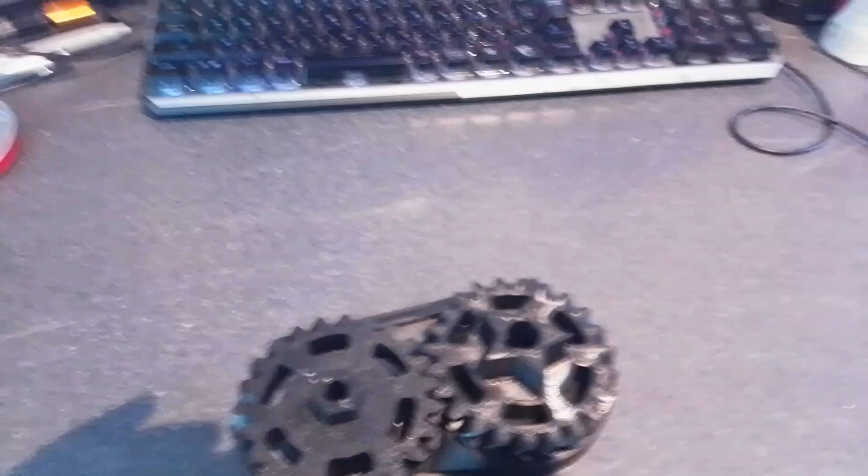Okay, I quite like doing the little video diary thing where I just patch together a few short videos. So I think I'll do it for this day. Today, I'm printing parts for the knee drive. That's a test piece, so let's just disable all this junk.

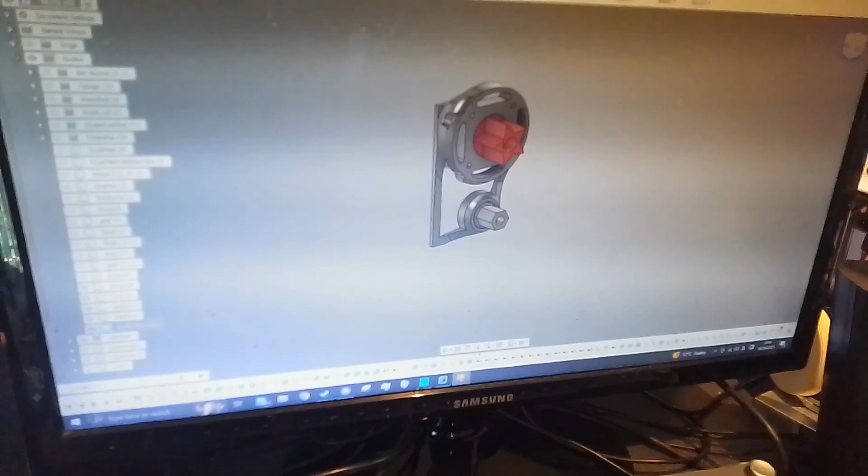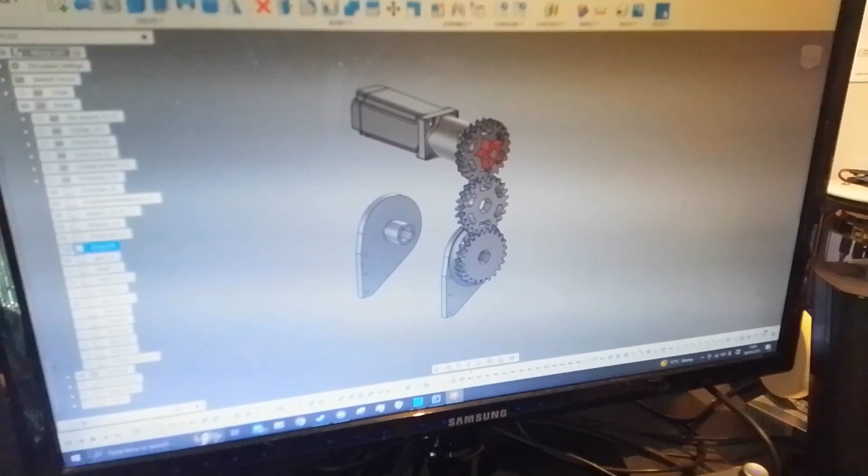We need the gears, the knee plates. Cool. That's the interface. The motor, which will sit right there. Shaft lock for the interface for the first gear. That's an empty body, I think. No, that's doing something. We'll leave that for now. We've got the shafts to keep the gears aligned.

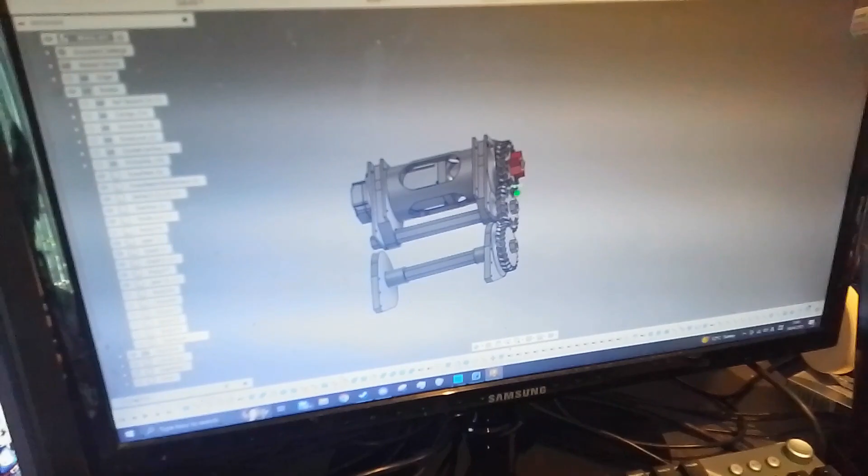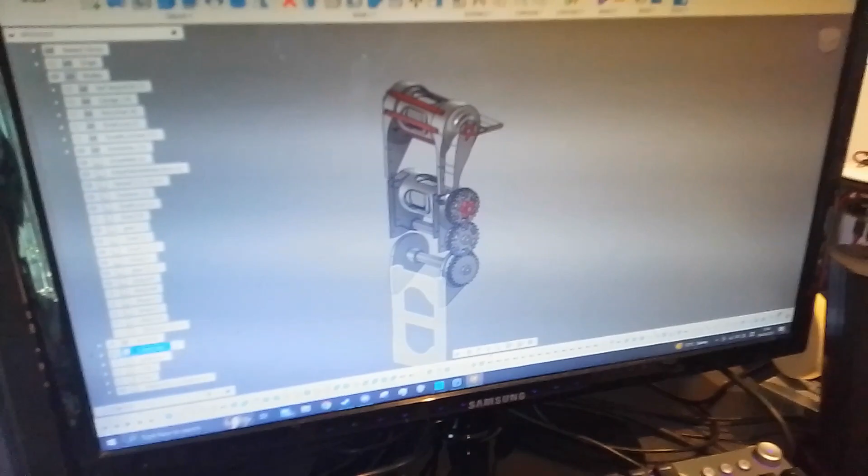We've got the motor casing, which is mahoosive as well. It needs to be printer friendly. I'm not happy with it, but one day this will be made out of something that's not PLA. And then a little interface for the shaft to rotate nicely, and then the rest of that's just test pieces. So let's turn on the hip, which will sit right there, and let's turn on the leg plates so we can see it in its glory.

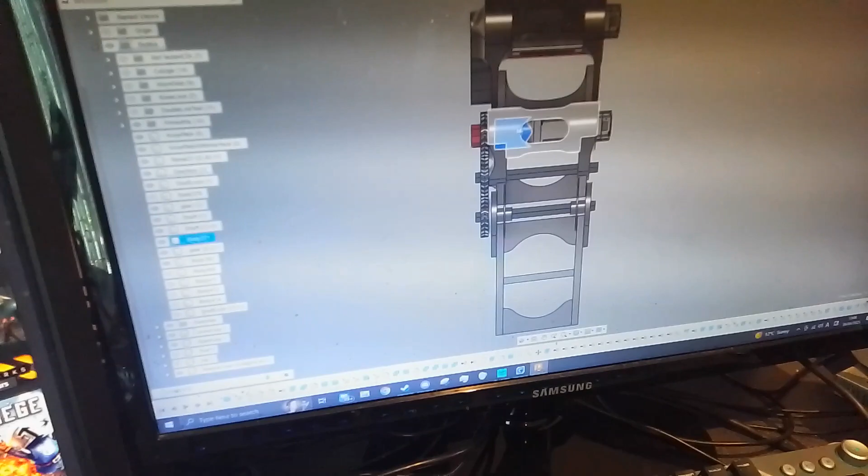As we can see, it's going to be quite large. It's still really wide, and that's just because of the pure size of the gearbox here. It's so long. So when we get a custom gearbox made, all of this, like transmission here, can be pushed inside of the leg. But for now, this is fine. And I mean, the profile, it's really not that bad. I thought I was going to have to use a lot more gears to achieve this. These are herringbone gears, so it should be pretty good for lack of backlash.

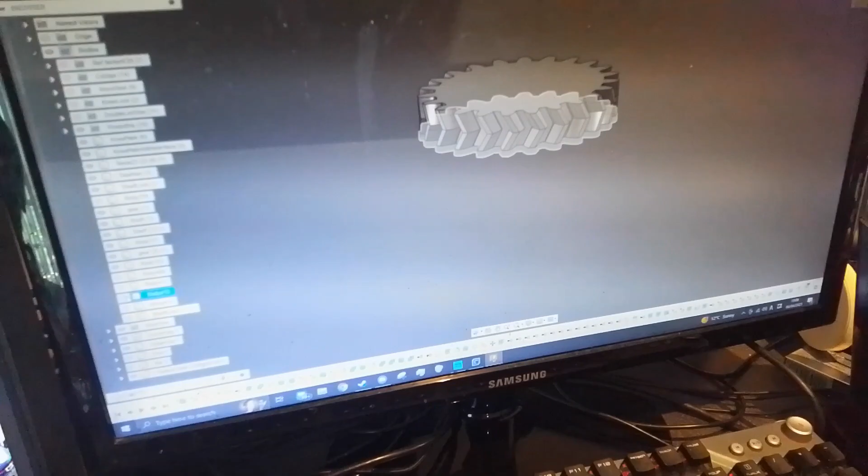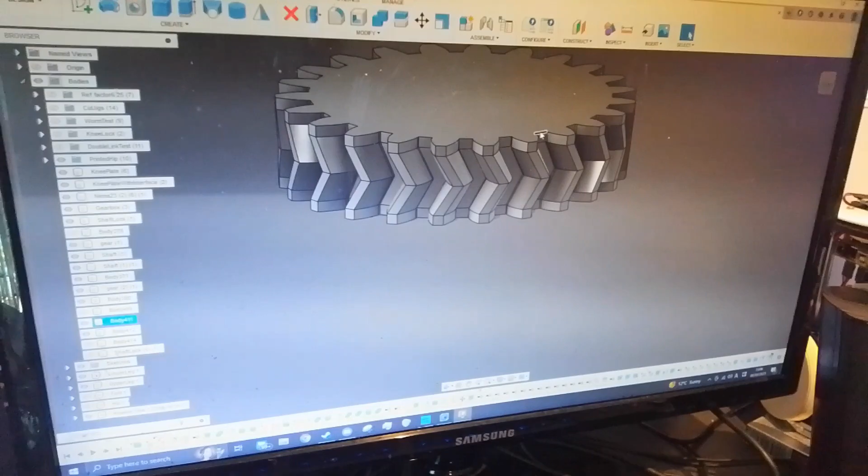I have had an idea for a new gear. So the idea is printed middle. So the actual gear itself is, which one of these is it? I've lost it. It's this. So this would be printed, and then these top and bottom plates would be plasma cut metal. So we get the strength of the metal and the surface area of the herringbone. But that's just an idea on paper for now. Don't know how well that will work. We're not going to use it for now, so that's fine.

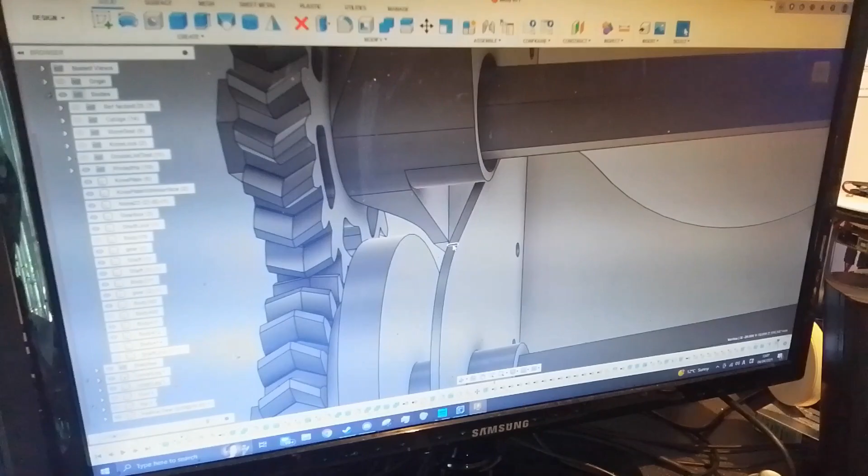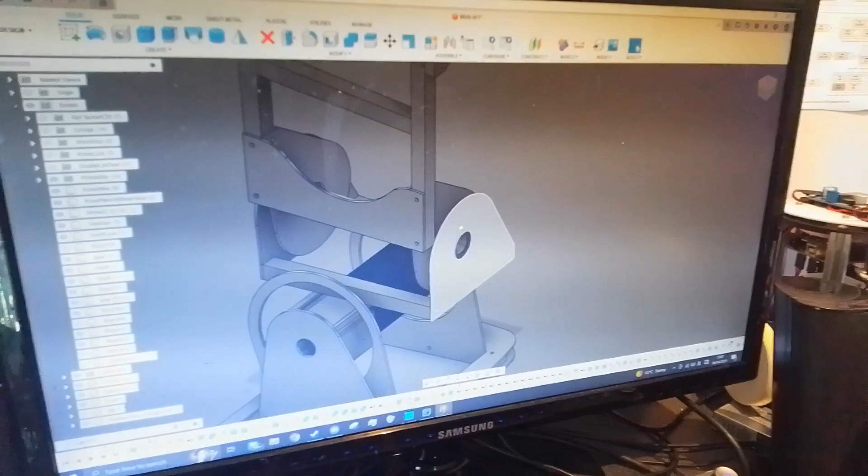But yes, I made these thick because of what we learned from up here, but I haven't replaced the thickness of these yet. These are still thin, so if anything's going to break, it's probably going to be these plates. Yeah, and when I know this whole assembly works, I can literally copy and paste all of this for here, because it's the exact same distance. Like from the drive to the knee, it's the same from this drive to the ankle. So it will transmit down to here. And then this one here will be direct drive anyway. So that sorts out all of these axes.

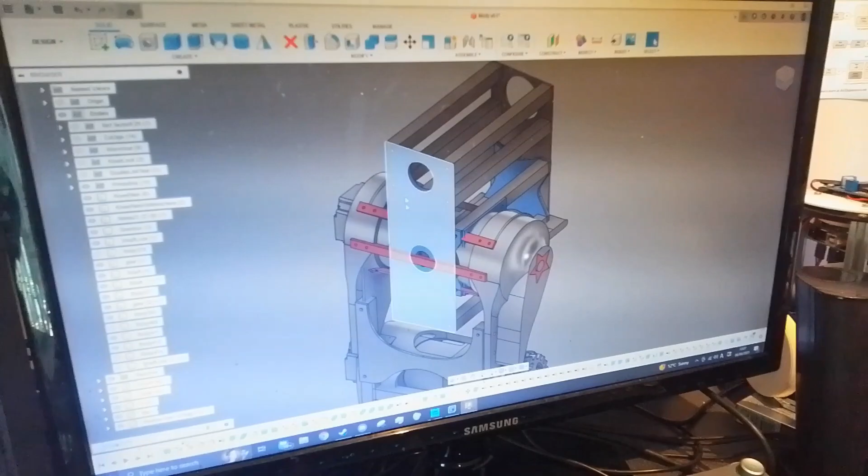And then we just need to build the two axes that will go up here, which I think, yep, still have it here. Of course, it's not modified. This is for the old design, but we have this axis, and then there'd be a motor between these 2 points that would achieve this rotation, and then a motor facing down for an extra axis. So that's the CAD pretty much done for that, and I have printed a little test thing.

This is only a part of the casing. No way I was going to print the whole thing and have it not work. 2 gears, and then of course it's a little hard to rotate these with one hand, but they work pretty good. They bind up in some areas, but that's because they just need to be worn in, I think. Here we go. That's better. And then there'd be an extra gear down here.

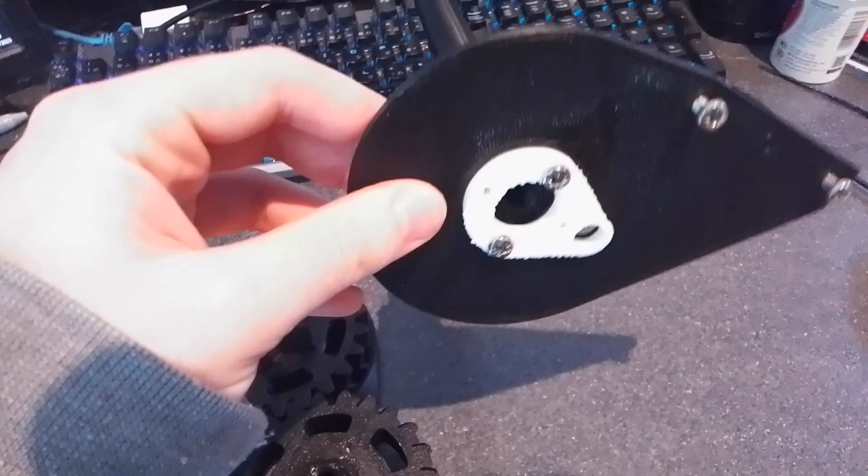The old system uses linkages, which we can see with this piece. It would fit in here, but this just wasn't working. I have high confidence for this one. I'll be quite upset if it doesn't work, but it's a learning process. So what can you do?

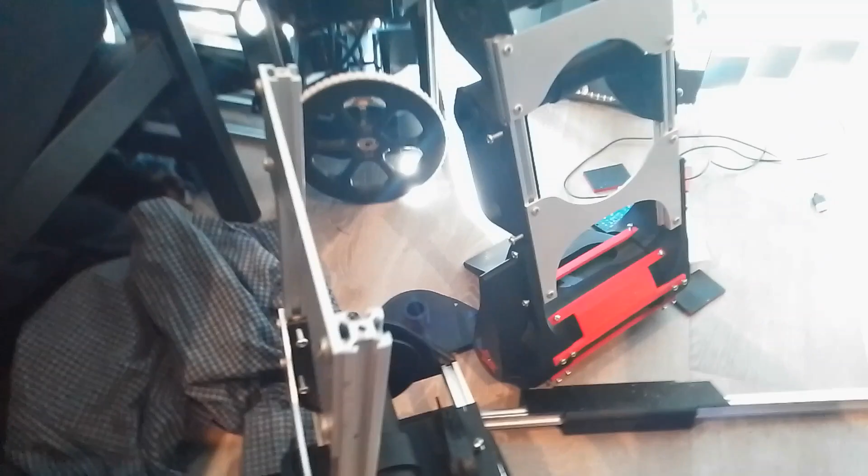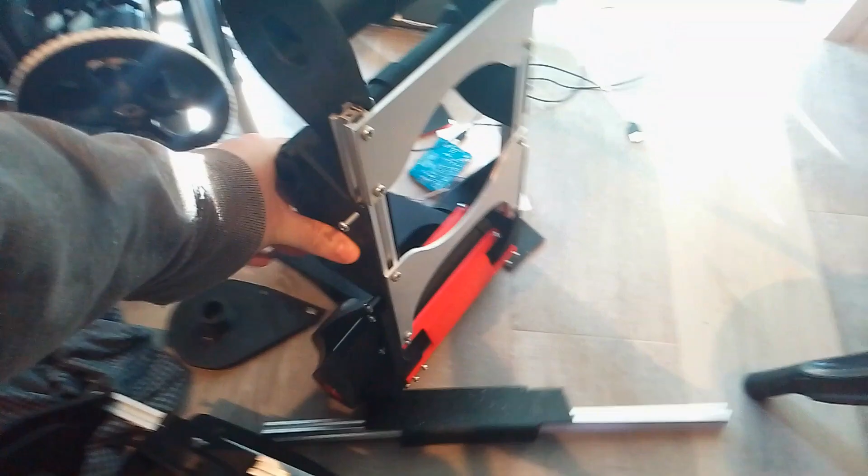I've already disassembled the knee. This part's being kept, but everything here is going to be the new plates. And then I need to remove this. Oh, what a mess. This is where the old linkage system went in. So this whole area here is being replaced with the new drive casing. The motors aren't going to be here for some time. They only just shipped.

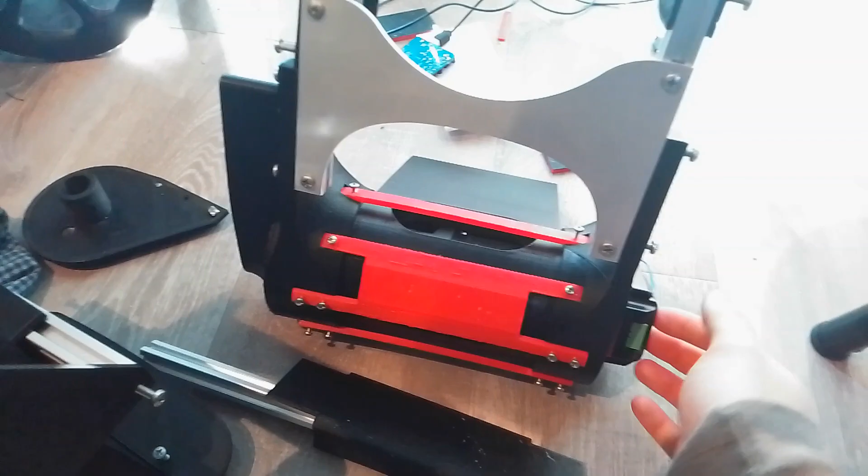So I'll probably just hammer out this one and just move it to the next casing. It just means I won't be able to simultaneously test the motors, which is upsetting. But when they arrive, it's just a drop-in and it'll be fine. I am going to start using actual wiring because jumper leads like these are kind of shit. So I'll make a rudimentary cable harness and we'll see how that goes.

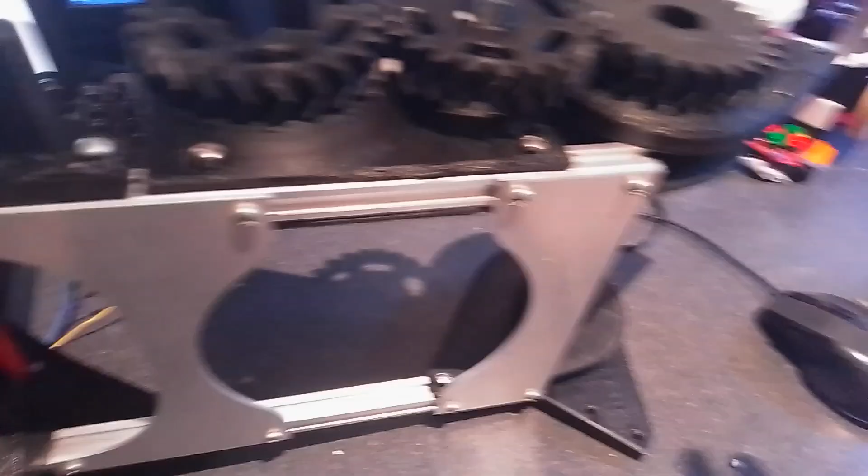Okay, in that last clip I lied a little bit. It's probably not getting done today. It's pretty dark out. Still printing parts. I've printed all the gears, the knee interface plates, and a test part. Two test parts actually. I printed this to make sure the spacing was right, which I think I showed in the previous part. And then I've made another one that has the parts I can mount to. This is what's printing right now.

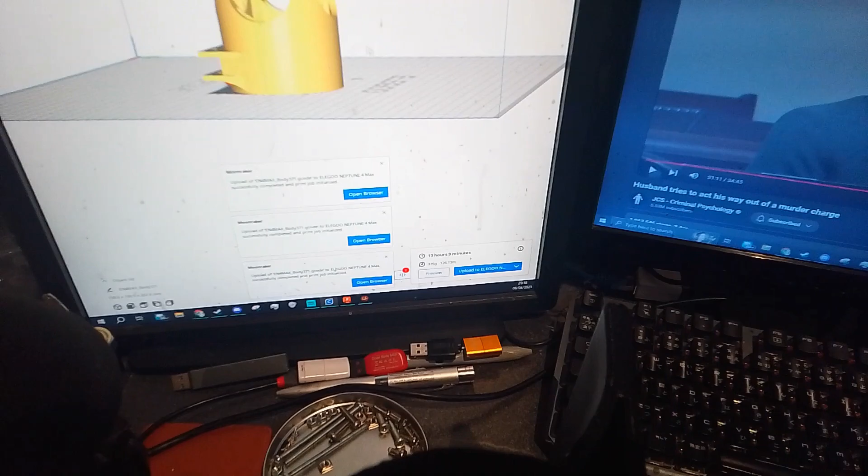Which is just the full version of this part. And that's going to take 13 hours, which is ages. So this is going to be a print I'll see in the morning. That is the biggest part, because after that it's mainly just interface and then 2 shafts to make sure everything's rigid. This shaft is not rigid. I made it really loose just so I can throw it on.

But how am I going to record this with one hand? This is tricky. I can do it like this. It does work quite well. There is a little bit of slack in the system, but look, it's all coming from that shaft. So once that's dealt with, this should be pretty rigid. I might also put a plate on top of this, just to keep them flat. But the thing about these gears, because they're herringbone gears, they kind of hold themselves in, so I probably won't need to do that. But it's very satisfying to move. So I'm very, very pleased with that.

I'm thinking when it comes to testing, this is probably going to shear right off. That is why I'm putting a shaft down the middle, but I can't see that lasting too long. So we'll see. And then I've just got to do it to this one as well. I've just got to put the same assembly here and then the gear train down to here. And yeah, that should be that done, which leaves me with the 2 more joints that go over here and then the direct drive down there.

I'm thinking I'll probably use these 2 sizes for this motor that will sit here, and then the one over here I'm going to have to figure something out for, because I don't think that will be as simple as normal direct drive. That's going to need some sort of system for it. But yeah, no, it works, which is great.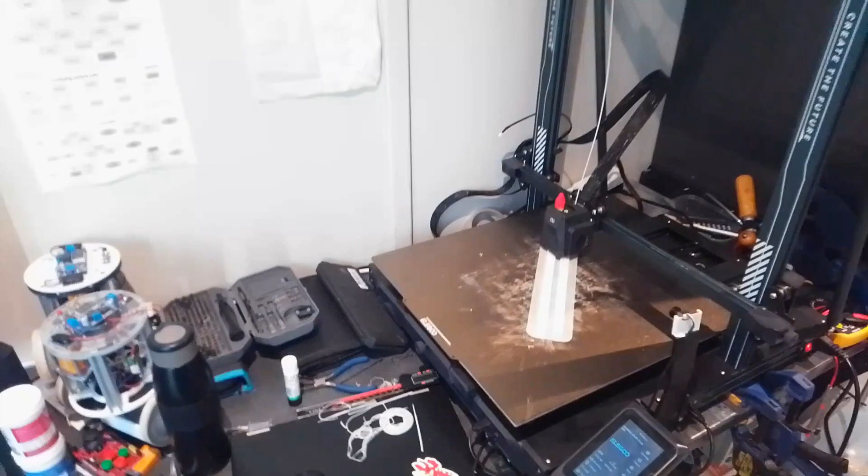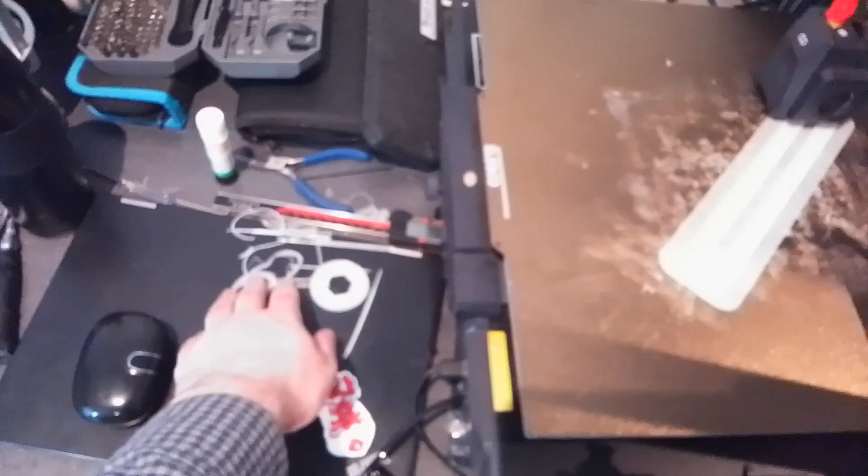Alright, so I've made some mistakes. I ordered 4 kilograms of ABS and not PLA, and my room's not really equipped for all this kind of printing. I've got the settings dialed in for this, but I've had quite a few fails. So I'm going to trade that in for some PLA at some point. I've got all of that. I do have yellow PLA, but I want to try and keep it to white and black. So yeah.

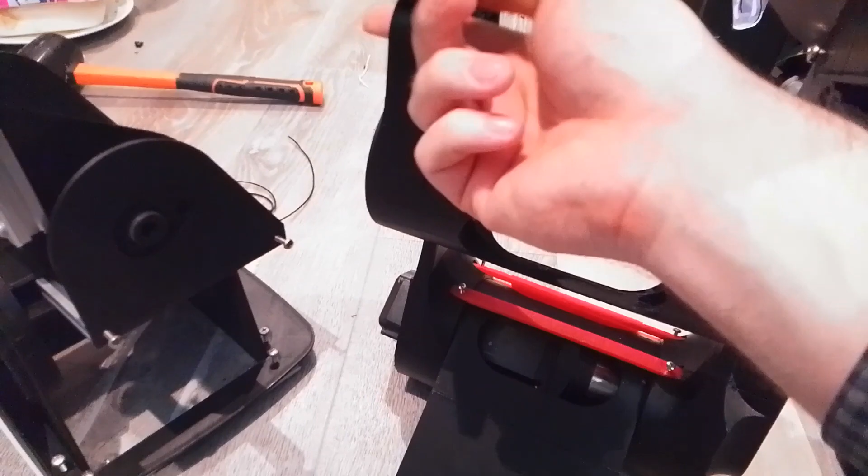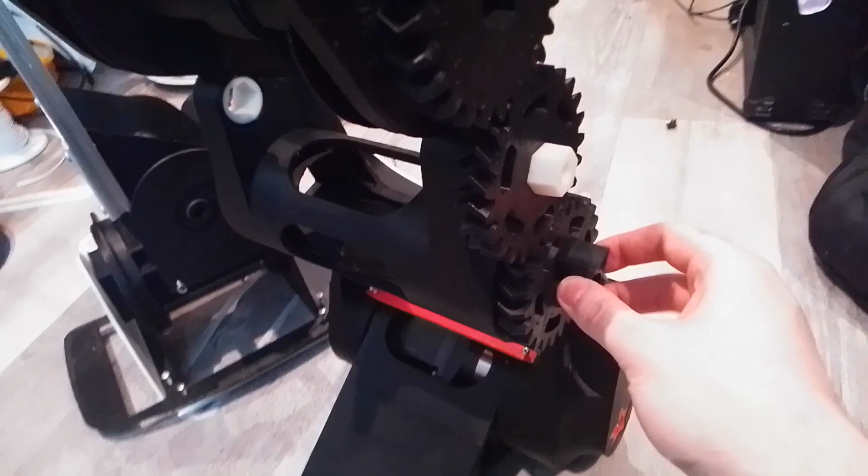Now, I've done some more printing. The casing for the motor is printed. It's quite a big part. And I've printed little channels for the axle to go through, and that's on both sides. This one's not the full length. So yeah, those are just the 2 shafts that go through this assembly and this assembly. There's a temporary test shaft in here. And with that installed, the give has gone down quite a bit. There's still a little bit here, and that's because of this star gear. But I predict that'll be gone when the new motors are installed.

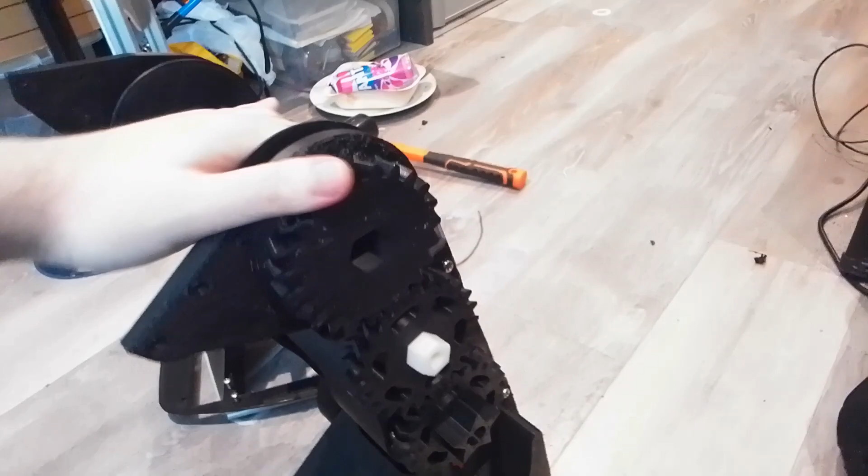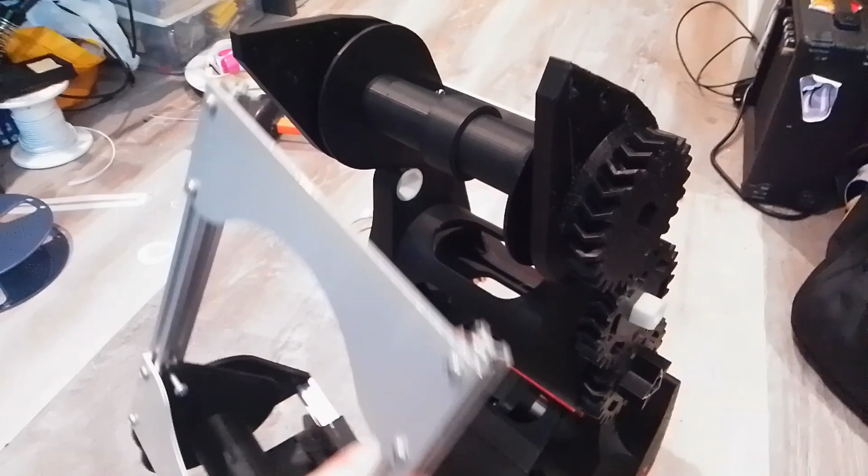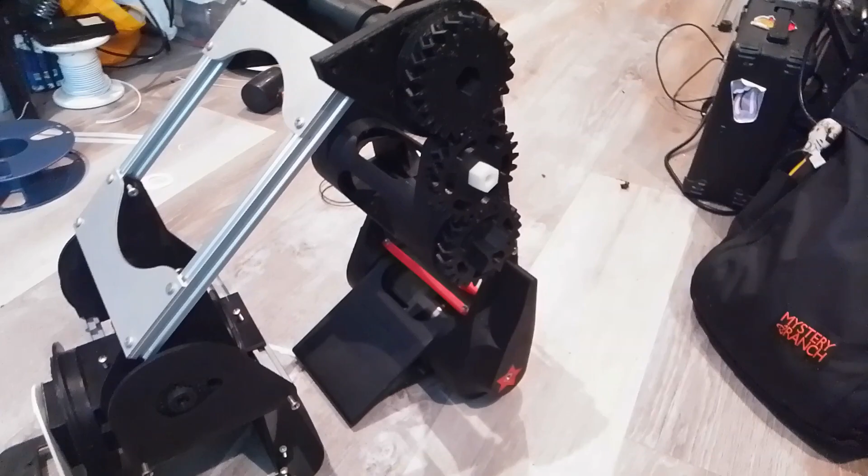But yeah, it's almost knocked it over there. It's pretty good. So when the shafts are done, I'll reattach this like so, and we can see how it looks. It'll be quite nice, I think. When I get the PLA traded in, I'll print the next.

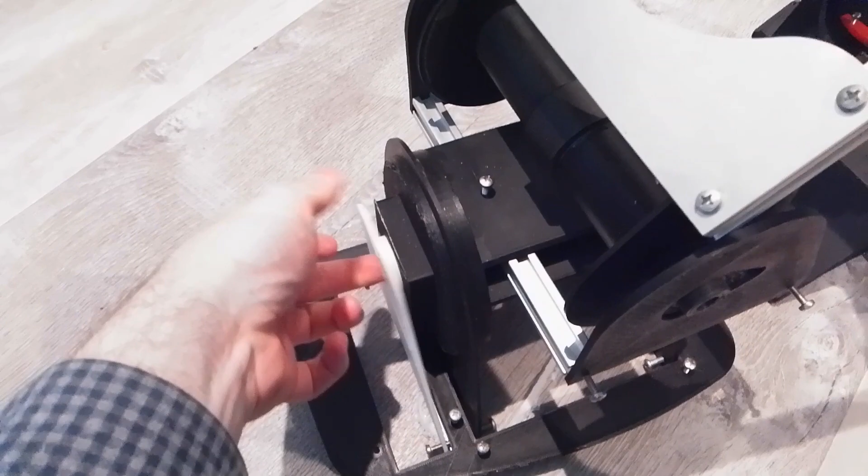All of this assembly, except for these 2 parts, are the same for this joint. So I just need to adapt this for this kind of mounting. But yeah, that'll be 2 more joints done, and then I just need to do this direct drive. No, this is where the output would be. And I'll probably just redo the whole foot, honestly. I mean, this is pretty crap.

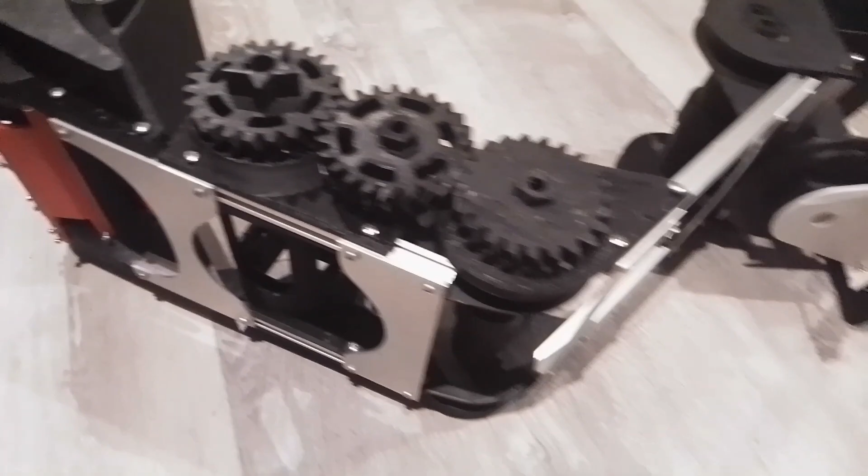I'm very pleased with the result. There's still this, but that's because I haven't replaced this yet. Once the motor's in, this should be done. But look, that's rigid, it's attached here now. Shaft here, there's a shaft in here as well.

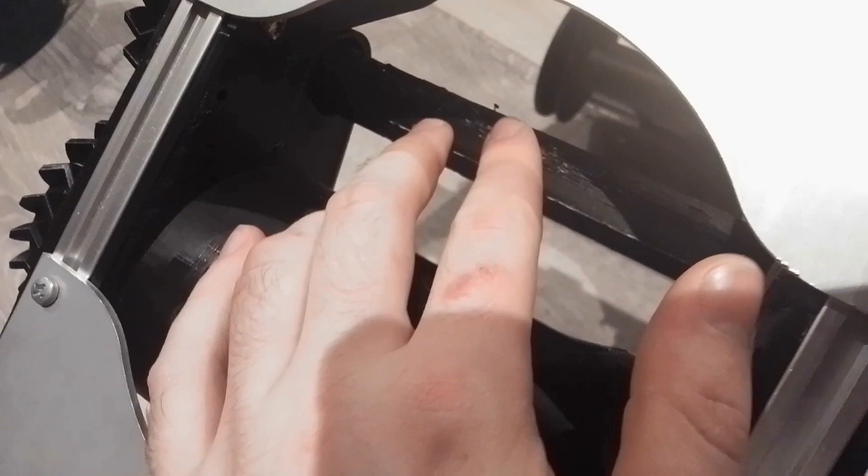See the ends, the prints came out a bit shitty. This is with PETG I had left over, so I'm not sure if it's just wet or anything, it's just not great. I'm going to trade in the ABS because Jesus Christ, that stuff printed terribly.

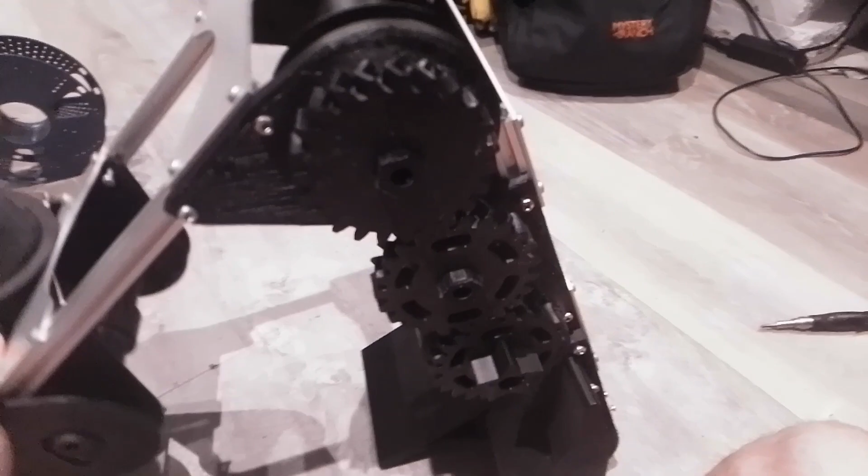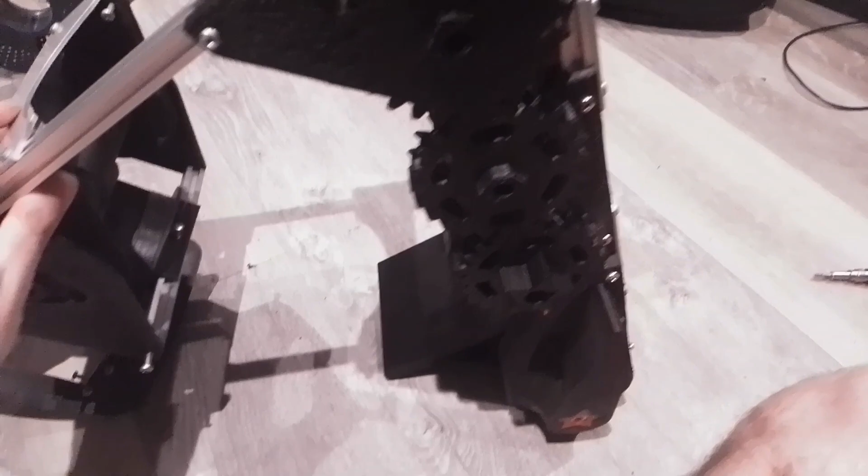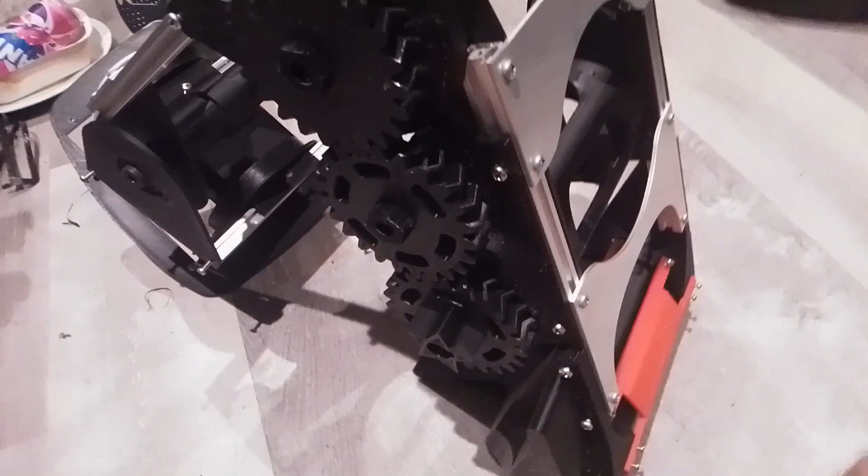But yeah, it's good. I wonder how we can demonstrate the movement. There we are. I'm quite pleased with that, so I reckon once there's a motor inside of it, that should work quite nicely. And if it does work quite nicely, all of this will be repeated for here and for this joint. But yeah, I'm very happy with that.